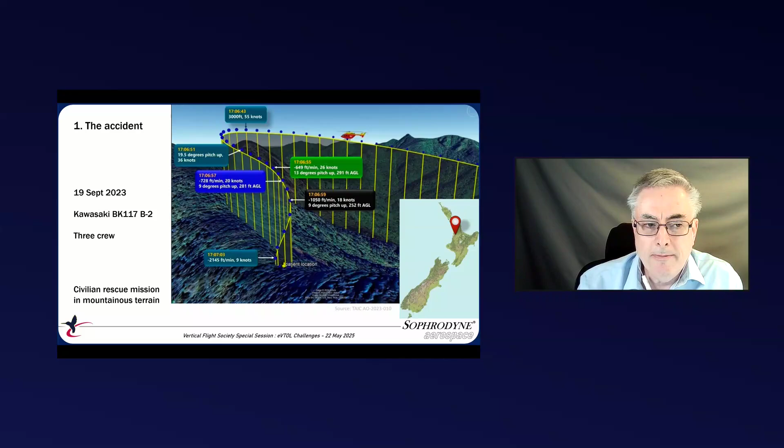So in late 2023, a rescue helicopter was dispatched to retrieve an injured hiker near the crest of an exposed ridge in the mountains of New Zealand. As the pilot decelerated towards the pickup spot, they found themselves in a steep descent from which they were unable to escape. Now, very fortunately, nobody was injured, and all the occupants and the hiker were eventually evacuated.

The accident was attributed to something called the Vortex Ring State, an aerodynamic phenomenon that I've spent the better part of the last 2 decades trying to understand. Now, it's quite likely that you've heard of the VRS, but what is it exactly? Well, unfortunately, the explanation that most folk would give, in terms of descending into your own downwash, is oversimplified to the point of being wrong. The fact that this description is still being circulated in influential circles is a whole other discussion, perhaps for another time.

We now know that the real explanation is a lot more interesting and physically beautiful. The rotor wake is inherently unstable, and in descending flight it can swap from its usual tubular form into a characteristic donut-shaped structure in which the rotor's ability to generate thrust is significantly curtailed.

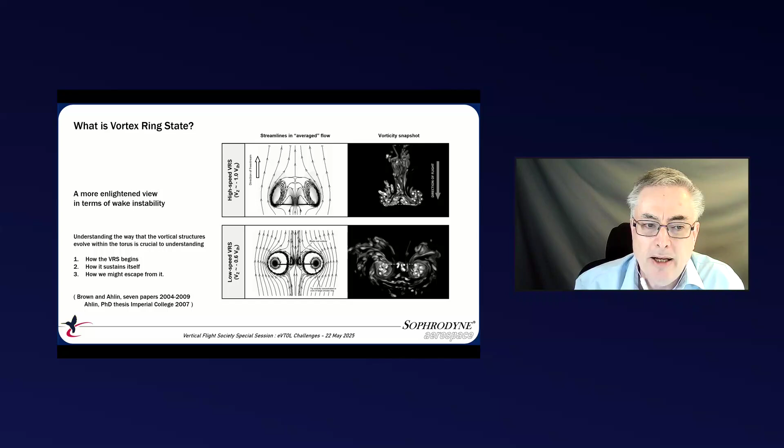Although the flow in the mean within this donut is essentially recirculatory, one of my brightest PhD students, Gary Ahlin, was able to show 20 years ago, through months and months of painstaking computational simulations, how vitally important it is to understand the detailed physical mechanisms that govern how the vortical structures evolve within the donut if we are to understand properly the flight dynamic effects of the vortex ring state.

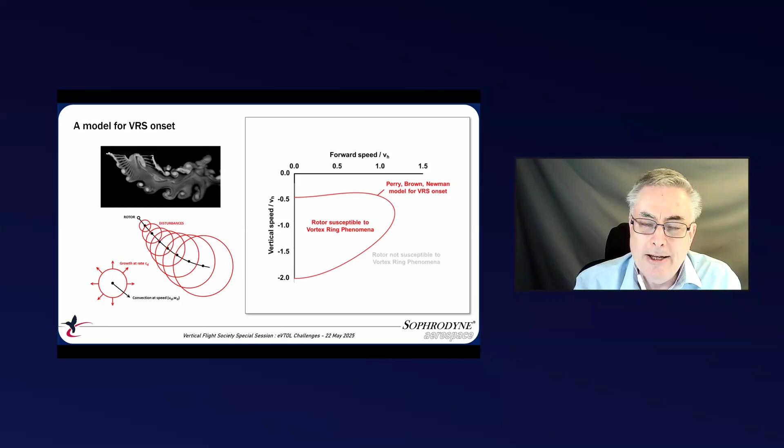Indeed, if we acknowledge these instability mechanisms as fundamental to the vortex ring state, then we can develop a very elegant and simple model for where the region affected by the vortex ring state lies on the flight envelope. And, indeed, the predictions of this simple model agree particularly well with the body of experimental evidence which has been gathered since the dawn of rotor-borne flight, showing where a helicopter might be susceptible to the vortex ring state.

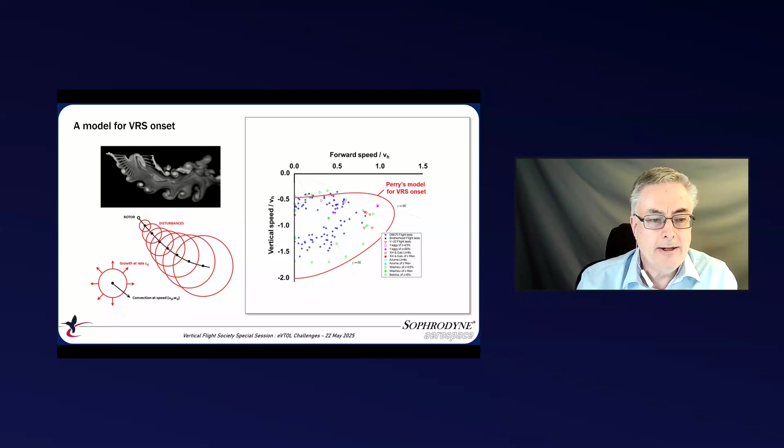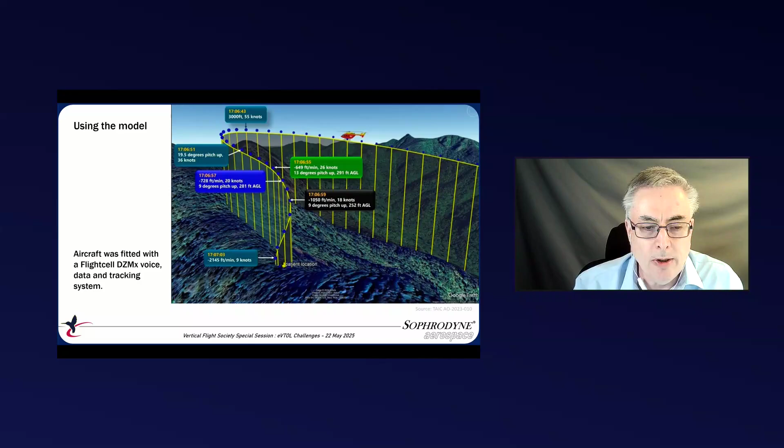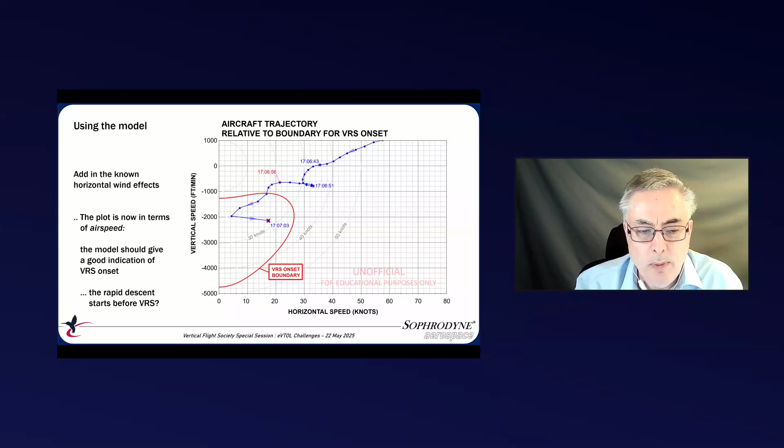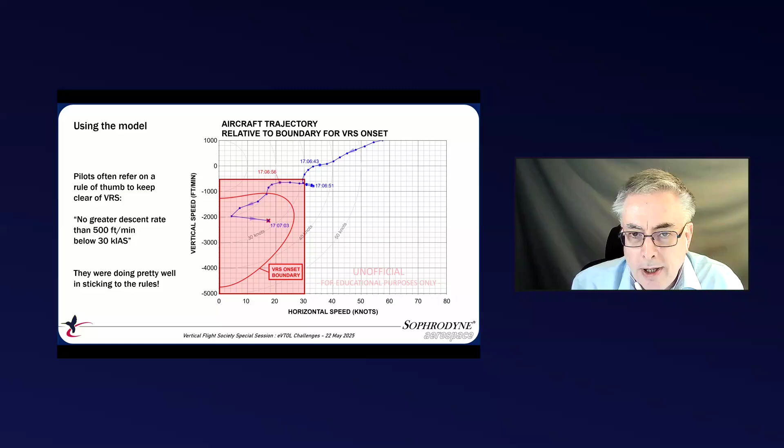Now, pilots are often trained to avoid the vortex ring state by adopting a simple rule of thumb. The most common version of this is not to descend at greater than 500 feet per minute if traveling slower than 30 knots. The pilot in this case was in fact doing a very good job of sticking to this rule, despite his very high workload at the time.

But most pilot training, and certainly the rule of thumb, doesn't account for 2 important additional effects. Firstly, deceleration and the associated backwards tilt of the rotor increases the effective rate of descent as seen by the rotor itself. Secondly, a similar effect, particularly common in mountain flying, is induced by the fact that the wind follows the local topography. Any downslope component of the wind, tending to increase the effective descent rate of the rotor, can be very difficult for the pilot to perceive, however.

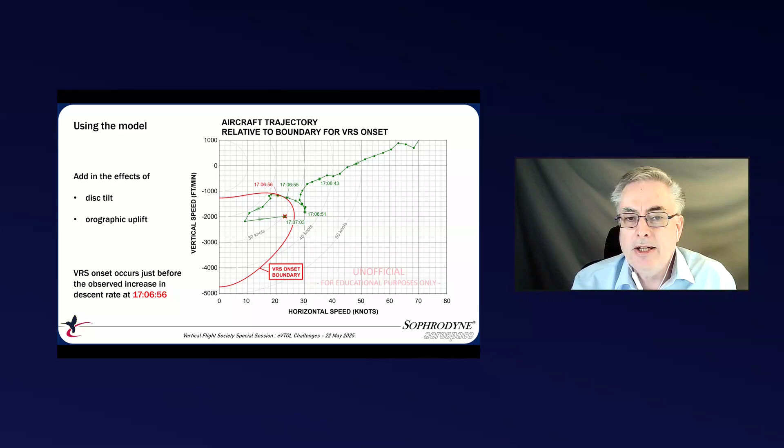Accommodating these effects to the best of our abilities ended up showing that vortex ring state was practically certain as the aerodynamic cause of the accident, with the data track showing the aircraft to have entered the vortex ring state just as the descent rate started to build up.

The analysis was technically acclaimed, but as usual, social media turned out to be the court of opinion, and one comment certainly stood out. A masterclass in hindsight bias and making the facts fit the theory. Well, yes, but that's also the basis of the scientific method, which is in fact a robust methodology to reach rigorous conclusions, even if they are uncomfortable and don't conform to your particular tastes. The commentator didn't seem to appreciate that the methodology admits very little wiggle room. Either the data fits the theory or the theory is wrong.

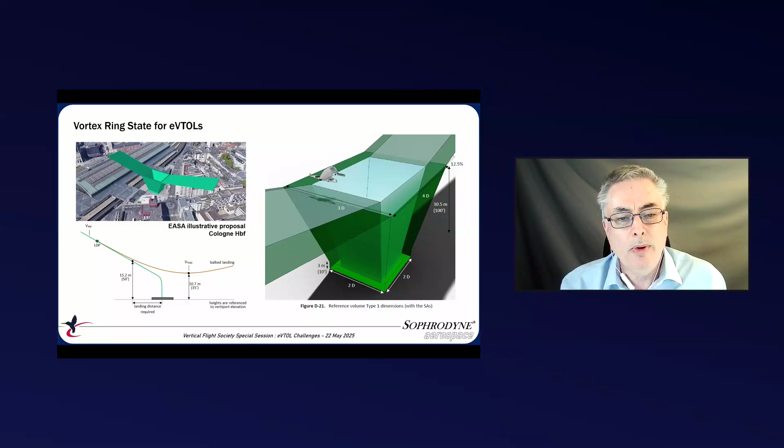So on to the next chapter in the saga. A couple of years ago, I gave a lecture at the EASA Rotorcraft Safety Symposium, showing how certain features of eVTOL physical design and proposed operational strategy might render them particularly susceptible to the Vortex Ring State. The content was particularly motivated by EASA proposals at the time to constrain the final descent of these vehicles into urban vertiports by forcing the last stages of descent to lie within a steep conical confinement extending upwards from the landing site.

Now, the geometric argument was moderately complex, but it showed that the possibility of entering the vortex ring state would have to be considered in every single instance when descending into a vertiport where the dimensions were constrained in this way.

The video of the presentation on YouTube got quite a lot of attention, I'm glad to say. But after about a year, this rather interesting comment appeared, which to my mind got to the heart of how a good proportion of the community probably happens to be thinking about these sorts of issues.

The author of the comment appeared to be suggesting that we might be absolved from considering the risks posed by VRS at all. Some all-powerful technology would come to our rescue and allow us to circumnavigate the issue in its entirety. The point is well worth considering. Was the comment just wishful thinking, an article of faith, if you will, or a well-supported scientific statement?

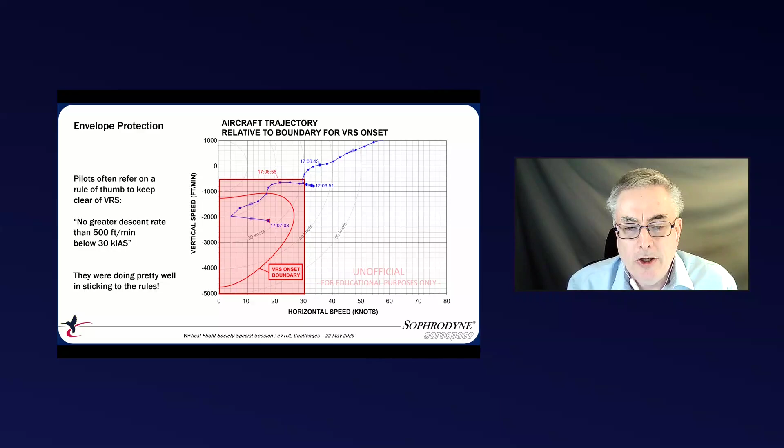Well, referring back to the New Zealand accident, didn't the pilot's rule of thumb constitute a rudimentary form of envelope protection? In that case, despite their best intentions, the intervention there had proved less than effective. In the urban eVTOL context, the complexity of the winds to which the vehicle might be exposed will in many cases make mountain flying look like a walk in the national park.

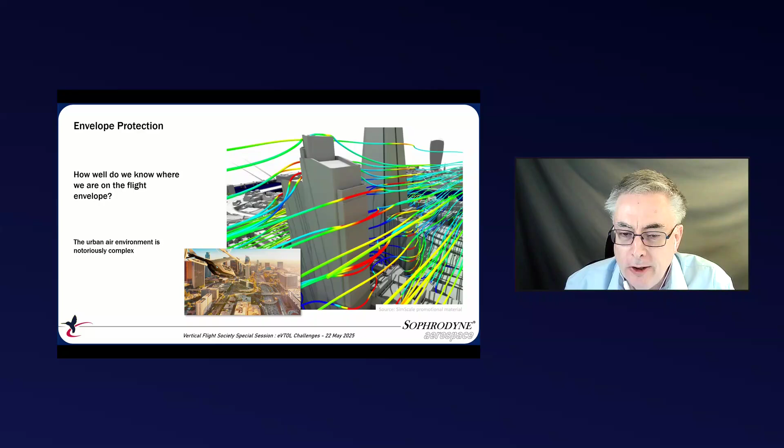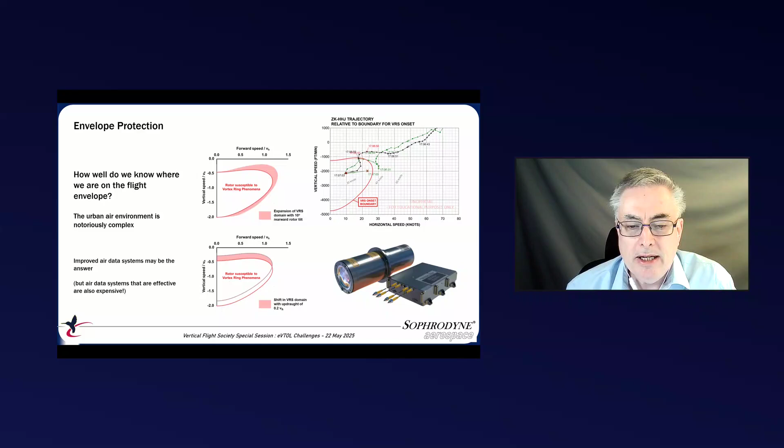So in much the same way as the pilot of the ill-fated rescue helicopter, how will we know where we are on the flight envelope? The kinds of instrumentation that might help us to resolve the wind environment are coming, but at the moment are limited in capability and heinously expensive. So how might we actually construct a workable protection strategy against the vortex ring state?

Firstly, the model that I helped develop is good, but generic. We'd need to do a lot better before hardwiring that into some flight control software, running the risk, of course, that it's all too easy to be either too conservative or alternatively excessively naive in the process.

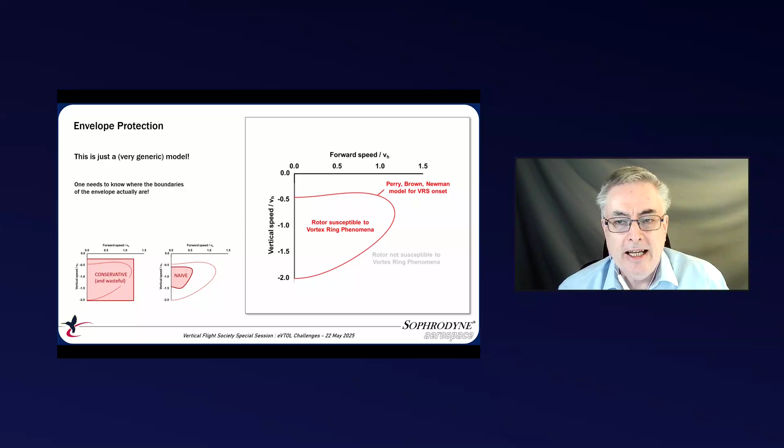And the research quality tools that we were using to show just how important the detailed dynamics of the vorticity is to defining the properties of the VRS are generally considered to be too expensive and difficult to use in industry. I vividly remember being alarmed at a senior industrial proponent's assertion at a recent Nikolsky lecture that speed of computation and ease of use could in many cases trump accuracy of prediction in the industrial context.

Well, in the case of VRS, this attitude is distinctly dangerous, and industrial simulations such as this, where all semblance of structure is rejected in favor of speed of execution, risks taking us back to the days of descending into our own downwash. We need to be careful of what we believe and why.

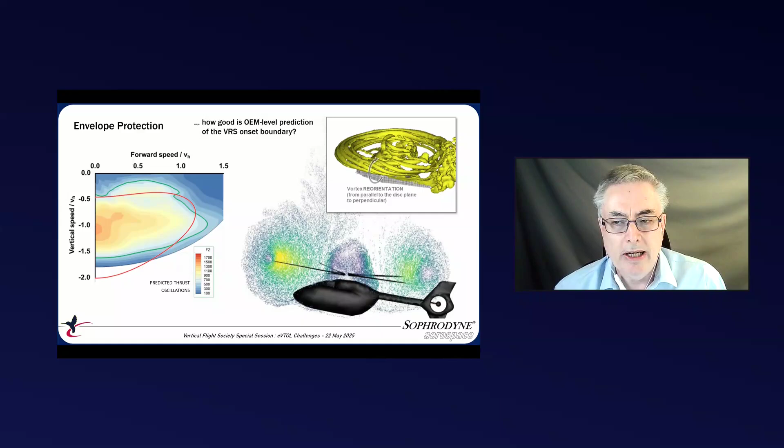So to the final chapter, a panel discussion, perhaps quite similar to the one that we're having now, with speakers just as illustrious. During the course of the discussion, the CEO of a well-known eVTOL company adds to the discourse, again effectively to absolve the industry from paying attention to the phenomenon, and he does this by making two seemingly rather profound and authoritative observations. Firstly, that the propulsors of a multi-rotor vehicle won't all enter the VRS at the same time, the implication being that the remaining functional rotors will save the day.

Well, firstly, I wouldn't be so sure. A lot of work has gone into showing that one rotor going into the VRS can have a knock-on effect in promoting VRS-like behavior on other surrounding rotors. I can imagine that this is not a feature that most manufacturers would like to explore during flight test, but wishful thinking won't make the physical arguments go away.

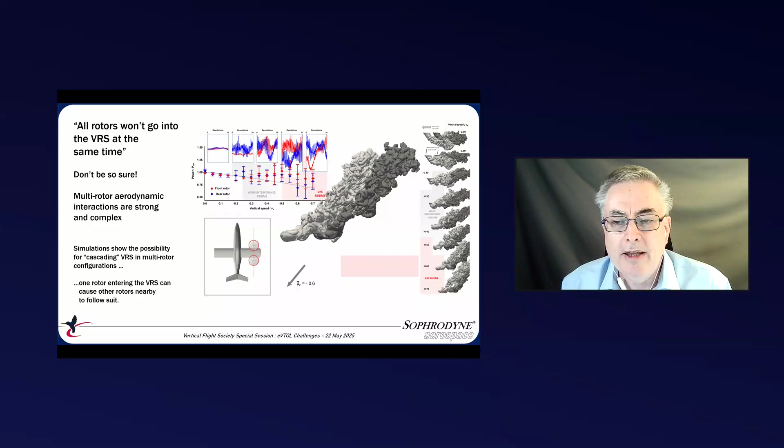Secondly, there are instances where all the rotors not going into the VRS at the same time is actually part of the problem. Witness the asymmetric entry into the vortex ring state that was held responsible for the crash of the Osprey so many years ago now that engendered most of the understanding of the phenomenon that we now can rely upon. All I can say is that if you're going to engage in wishful thinking, be careful what you wish for.

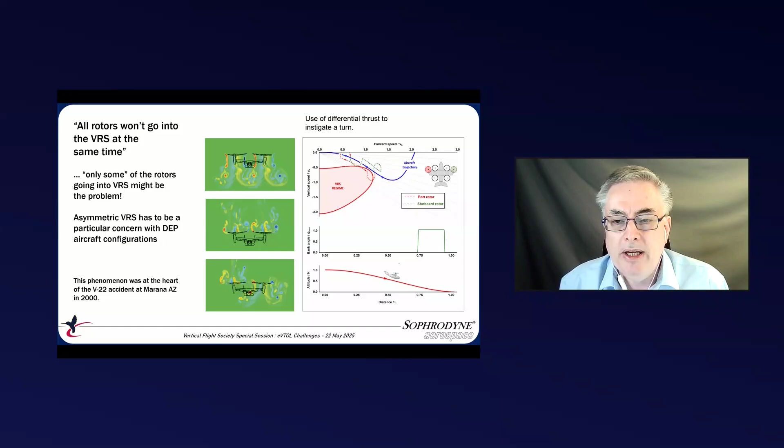And finally, if you're going to rely on importation of ideas from other domains, no matter how analogous they might be, make sure that your analogies are valid. So, nacelle tilt is indeed a powerful escape mechanism that twin tilt rotors can use to escape from parts of the VRS domain. But in the eVTOL case, the double-edged sword is that the algorithm used to trim the aircraft, if not designed with specific exclusions in mind, can actually precipitate the rotors into the VRS just as quickly as they can extricate them.

Now, I believe it's incumbent on us as serious professionals to thrash through these issues and to debate them fully out in the open, rather than in closed chat rooms and via Facebook and LinkedIn. Remembering that it is the men and women at the sharp end who will bear the brunt in terms of the safety and reliability of the products that we develop.

Indeed, it is these brave people that are left exposed by the weaknesses in our logic and by the fallibilities that are embedded in our articles of faith. And they will experience them in a much more immediate and intimate way than the shareholders and investors in the companies who are agitating for immediate solutions to some of these very thorny problems.